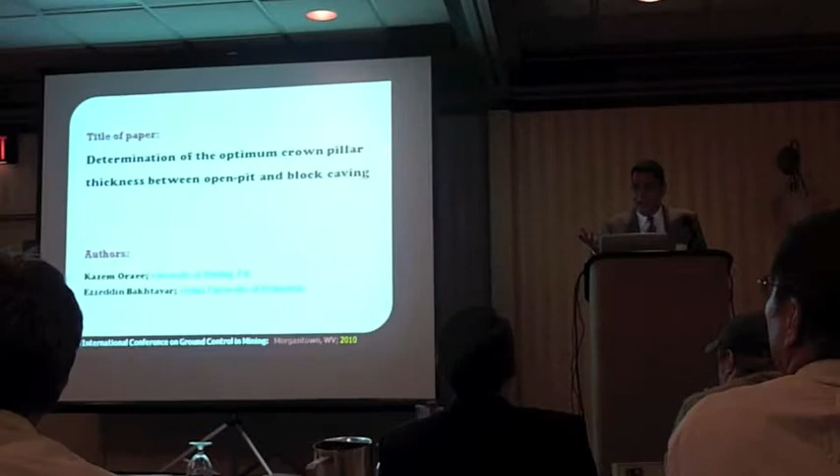Now we are going to talk this time about something which is slightly different, although it is pillar again. Ground control and pillar, of course. What keeps the ground is the pillars, but slightly different. The crown pillar between open cast and underground mining, and especially in this case, block caving. But it's slightly different from the previous ones.

Determination of the outline: introduction, dimensional analysis, which is what we are going to use to calculate the optimum thickness of the crown pillar, modeling, and then conclusions.

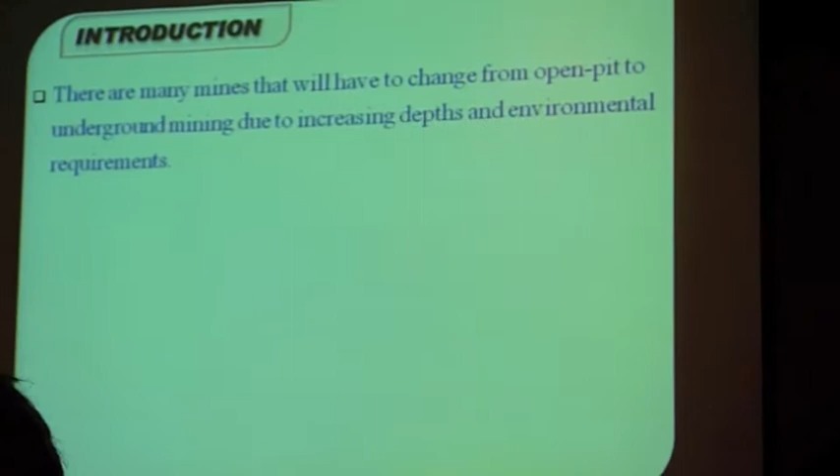There are many mines which are going to have to change from open cast to underground mining soon, in the next years or few decades. The most important reasons are that the depths are increasing, therefore they are becoming more and more expensive. Secondly, the relatively recent reason is the environmental requirements.

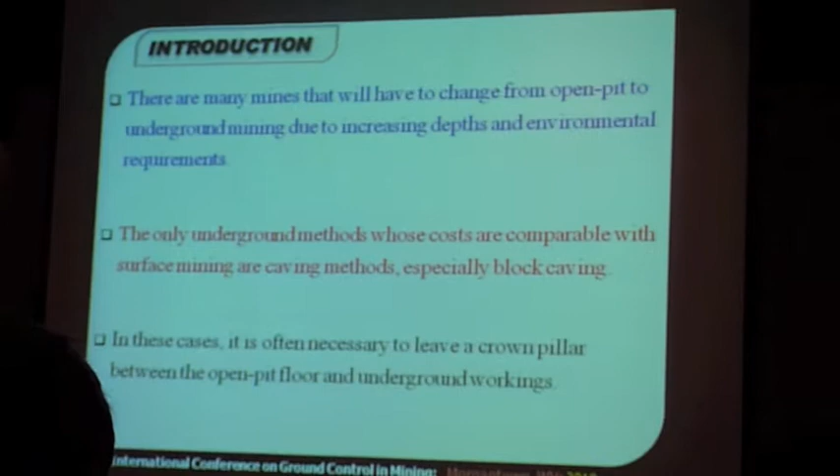We all know open cast mines have much more environmental effects than underground mines. And when that happens to any open cast mine, the first methods they will have to consider will be caving methods.

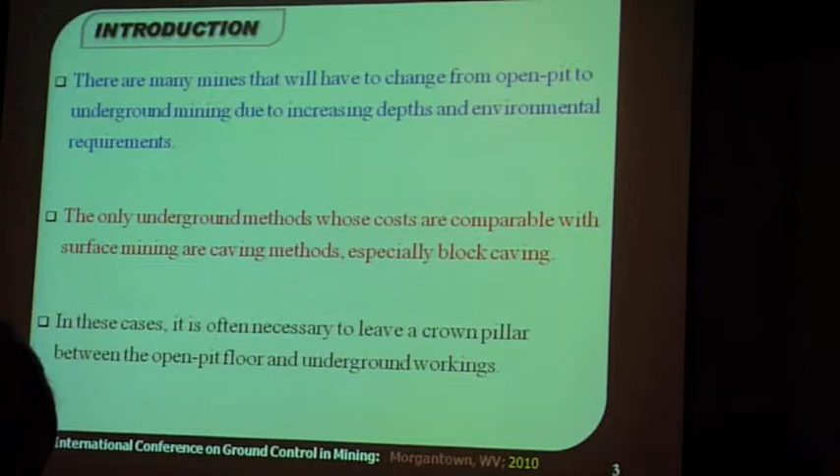The reason why open cast mining companies don't like changing into underground mining is that the costs of underground mining are expected or thought to be higher. But there is one underground method in particular, the block caving method, whose costs are comparable with surface mining, especially when the surface mining pits become deeper.

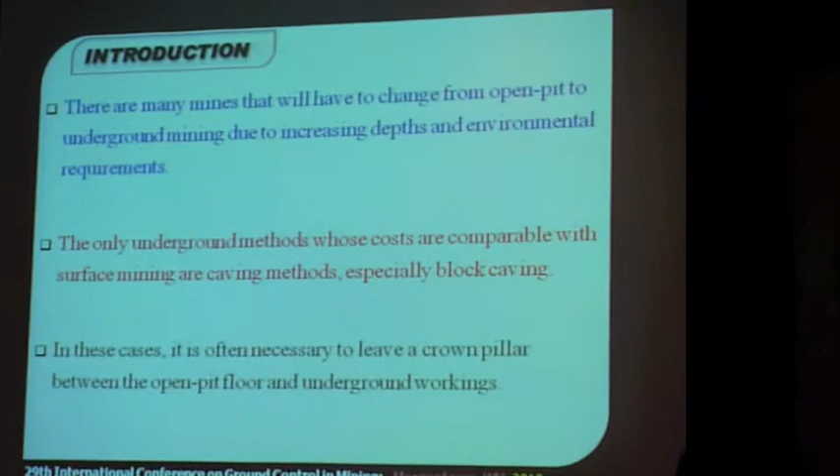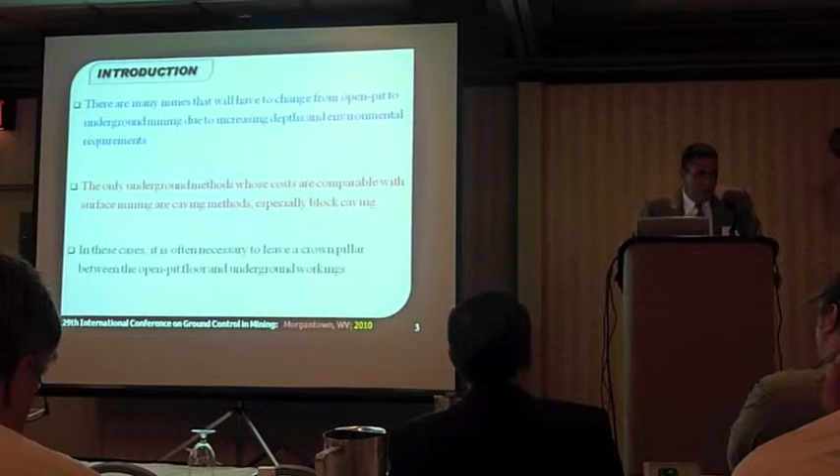In such cases, where there is an open cast mine and the rest of the deposit is going to have to be mined by underground mining, there is a crown pillar required to be left. What we want to do is find the thickness of this crown pillar.

The main requirements of these crown pillars are to provide ground control, just like all other pillars, for both the surface and underground mine, and to minimize interference between the two mines, which is very important.

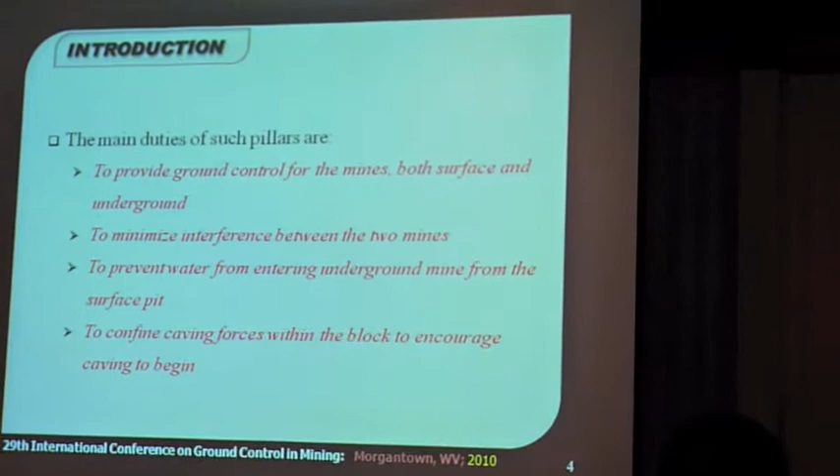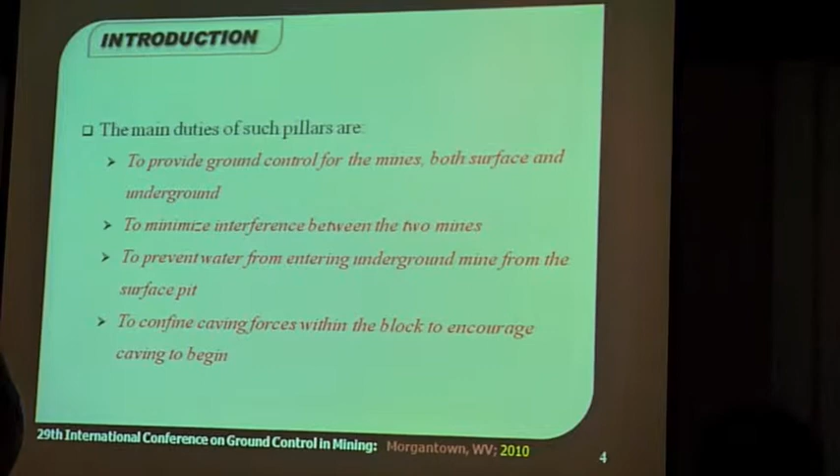I don't want to emphasize these, you all know, everybody has talked about that. And to prevent, particularly in this case, the entering of water from the surface to the underground mine.

Again, as we know, when surface open cast pits become deeper, the problem of water increases, and we don't want this water to seep into the underground mine.

And finally, particularly in this case, to confine caving forces within the block to encourage caving to begin. In block caving, this is one of the biggest worries of mining design engineers when they decide to use block caving and when they are planning block caving blocks.

In case they design the block, they drive all the roadways, so many of them, develop all the roadways underneath the block, which could take many months or even years, and a lot of money is spent on driving and maintaining these roadways, and then the ore inside the block does not start to cave.

I always say to my students that if it doesn't start to cave, all we can do is sit down in one of those tunnels and pray.

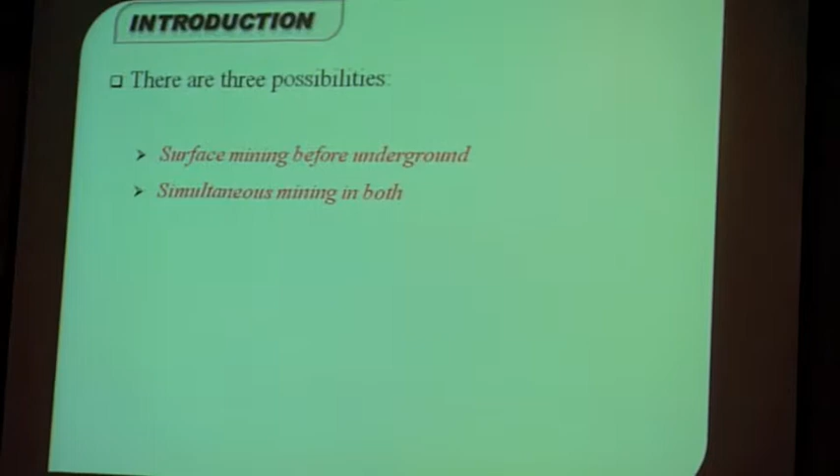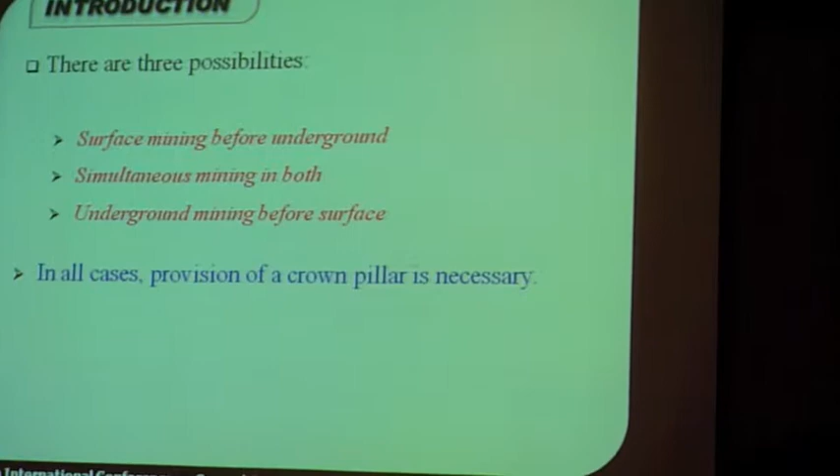There are generally three possibilities in these cases: surface mining before underground mining, simultaneous mining in both, and underground mining before surface. In the second and third, the crown pillar is totally necessary. Even in the first one, it can be said that it is necessary to leave a crown pillar.

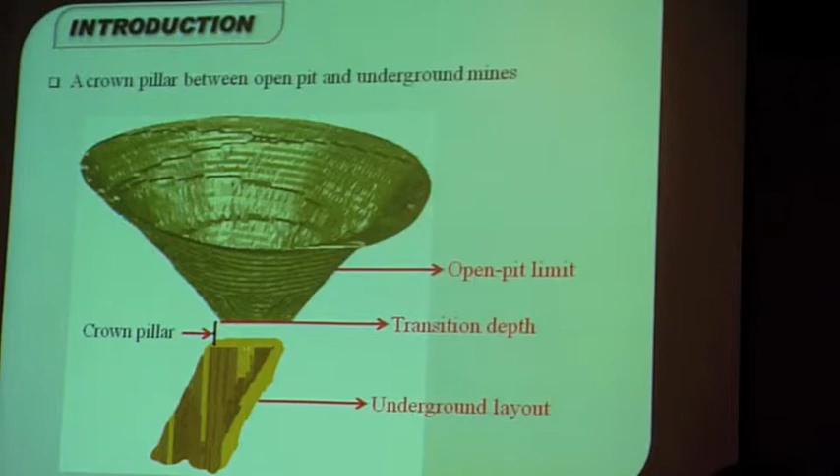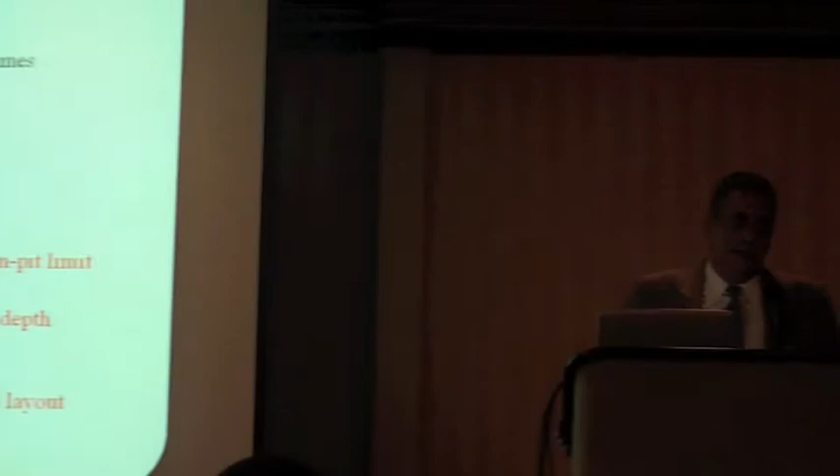This is just a picture. The top part is the open pit, conical shape, of course. Then the transition depth, that is the depth at which the cost of mining each ton of ore is the same for underground and surface mining. Below that depth, it is cheaper to mine the ore by underground methods, in this case by block caving.

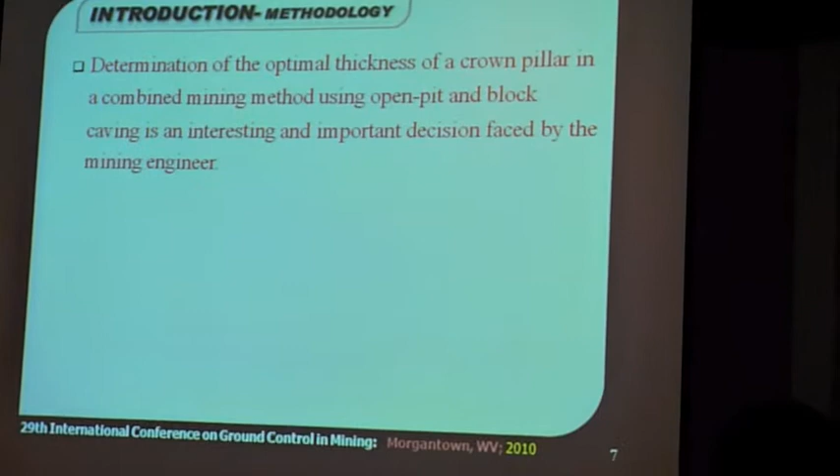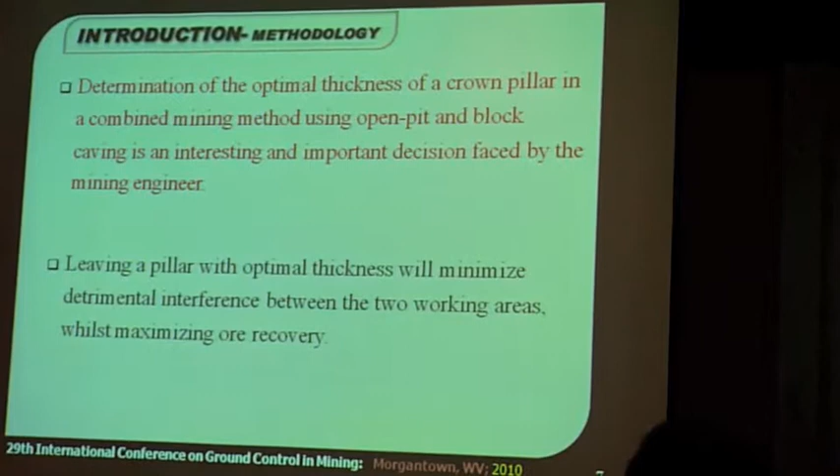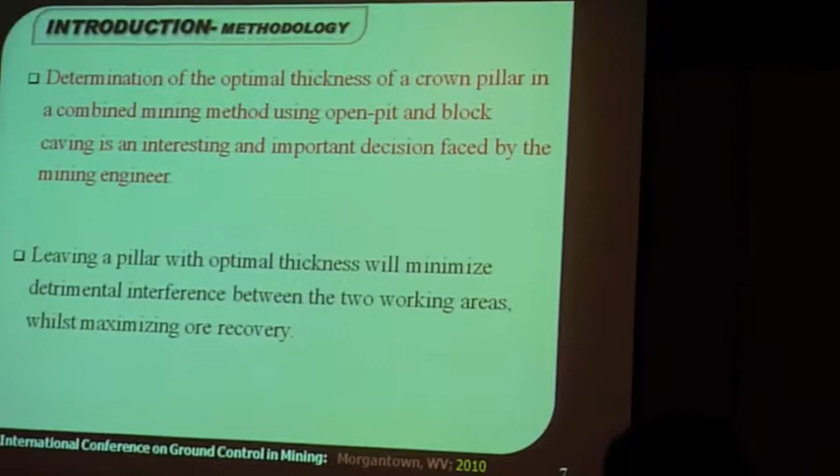Determination of the optimal thickness of a crown pillar in a combined mining method using open pit and block caving. I stress in this paper we are assuming that the underground method we are going to use is block caving, because the formula produced will be different if we had decided to use shrinkage, cut and fill, supported stoping, or even sublevel caving.

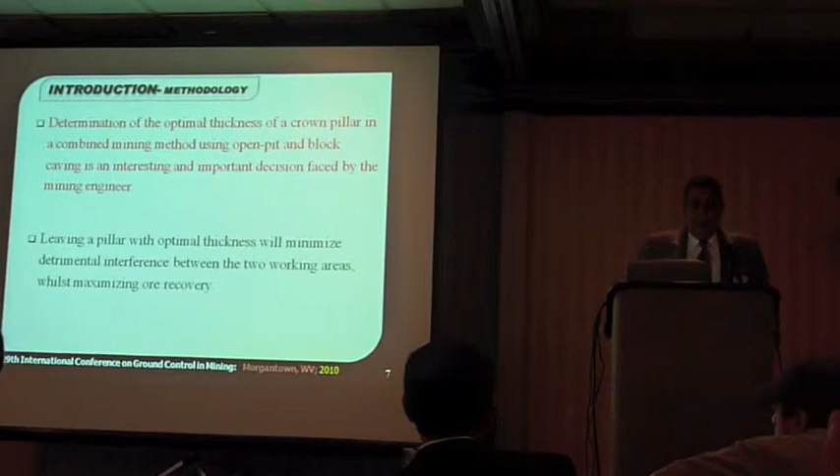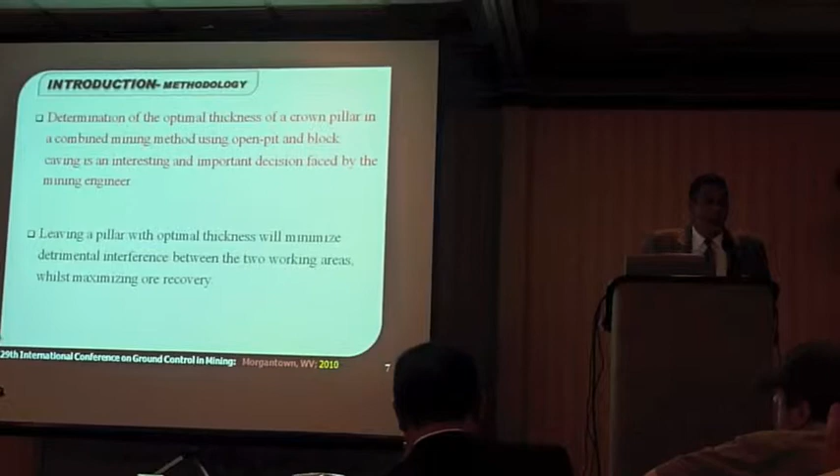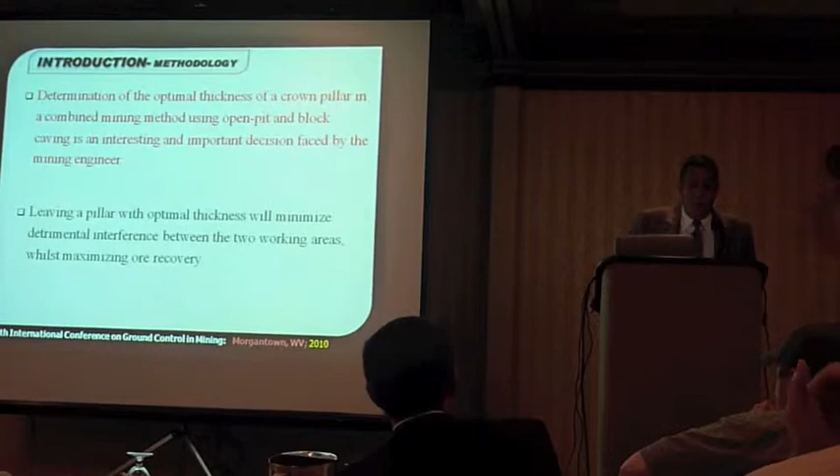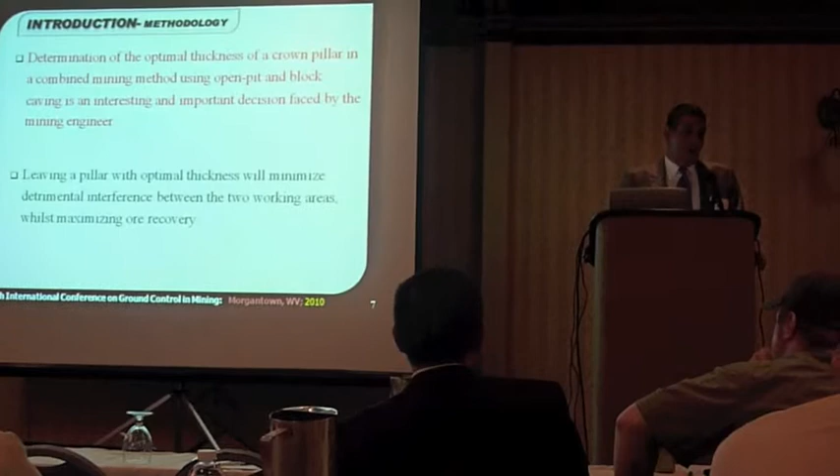This problem of determining the optimal thickness is an interesting and important decision. It is interesting because it's relatively new, and important because leaving a pillar with optimal thickness will minimize detrimental interference between the two working areas, whilst maximizing ore recovery. If it is too thin, it has detrimental effects. If it is too thick, we have reduced recovery.

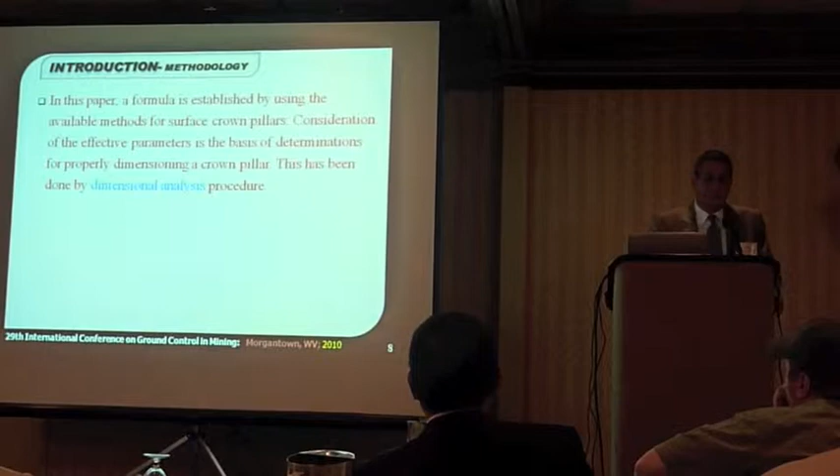Methodology: in this paper, a formula is established using the available methods for surface crown pillars. We do have methods for surface crown pillars.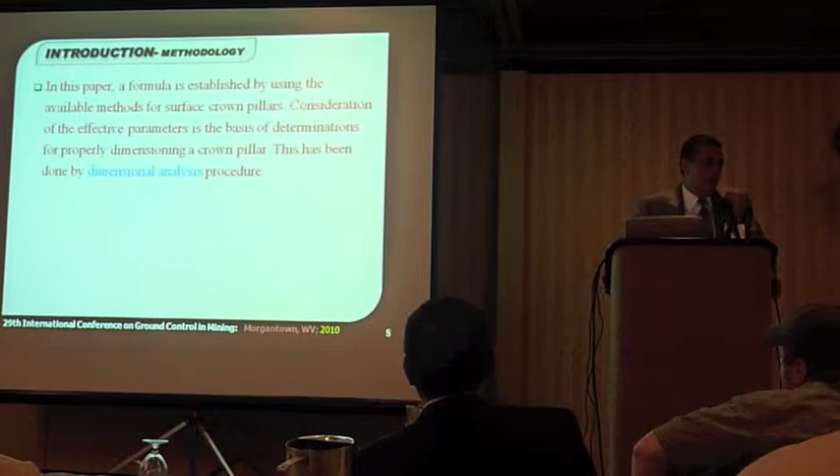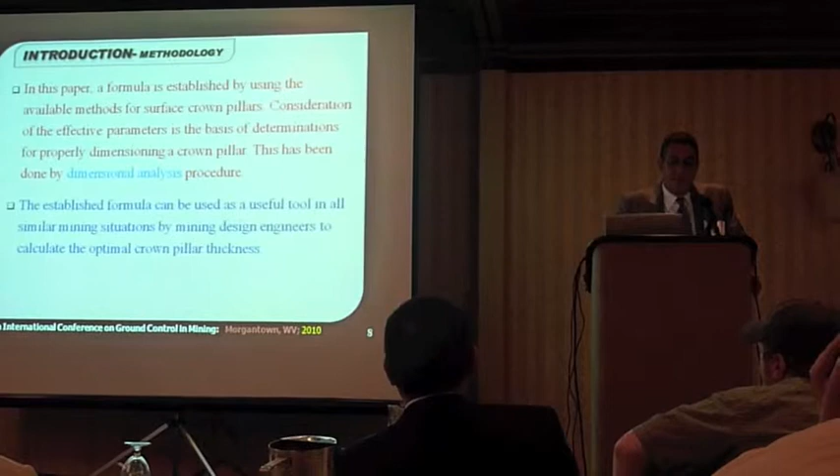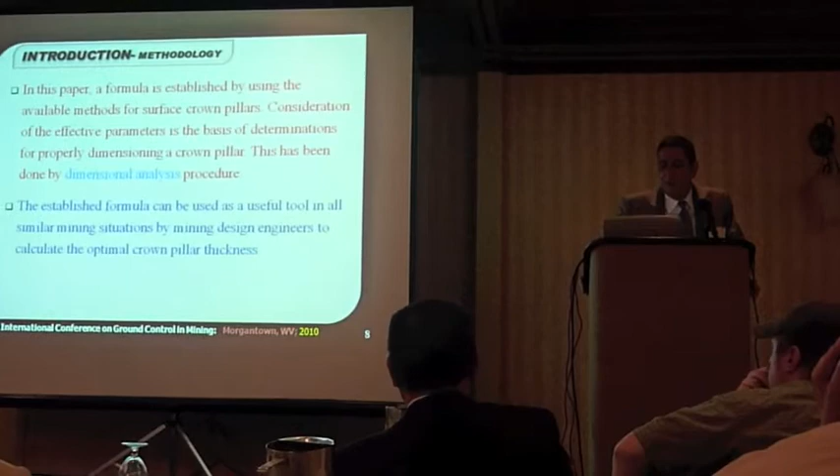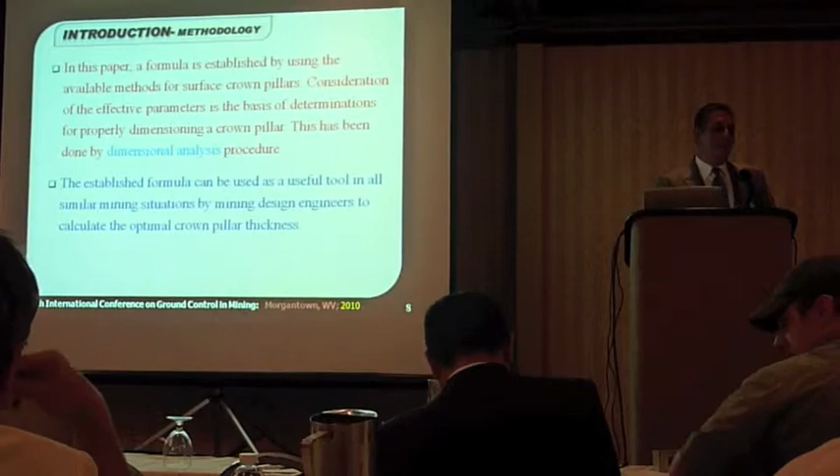Consideration of the effective parameters is the basis of determination. This has been done by dimensional analysis, the method we are going to use. The established formula can be used as a useful tool in all similar mining situations by the mining design engineer to calculate the optimal crown pillar thickness.

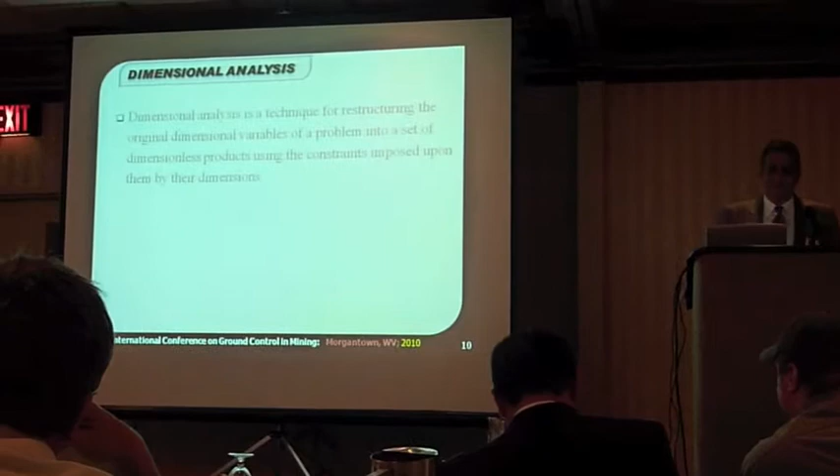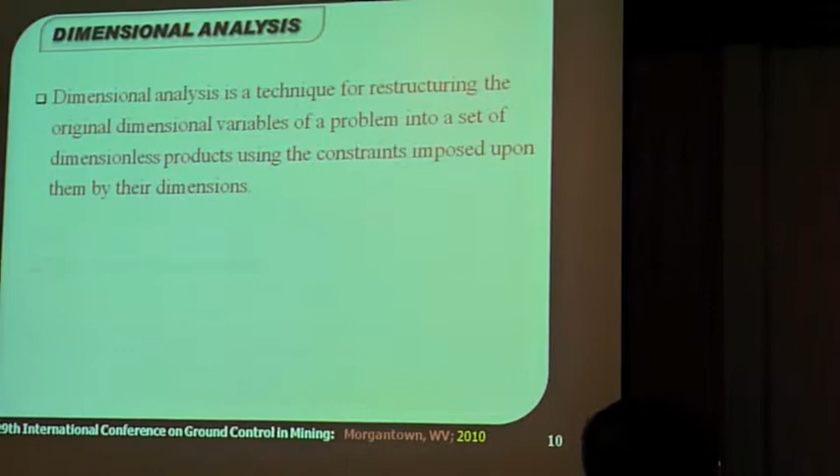Dimensional analysis is a technique for restructuring the original dimensional variables of a problem into a set of dimensionless products, using the constraints imposed upon them by their dimensions. This is the definition of dimensional analysis.

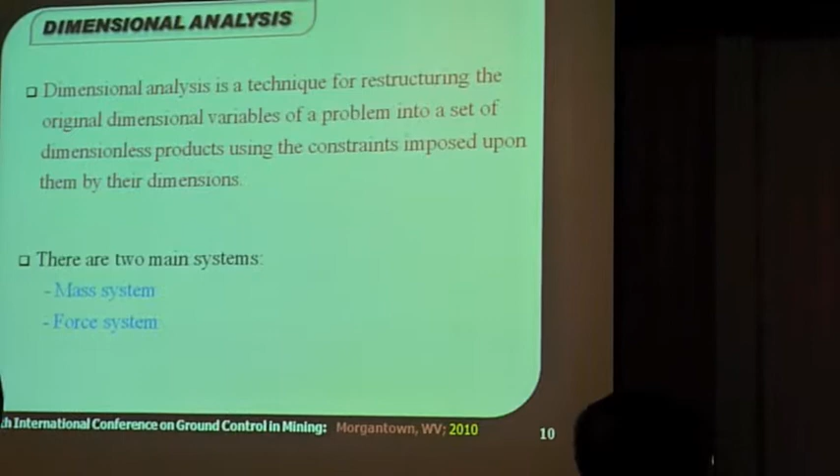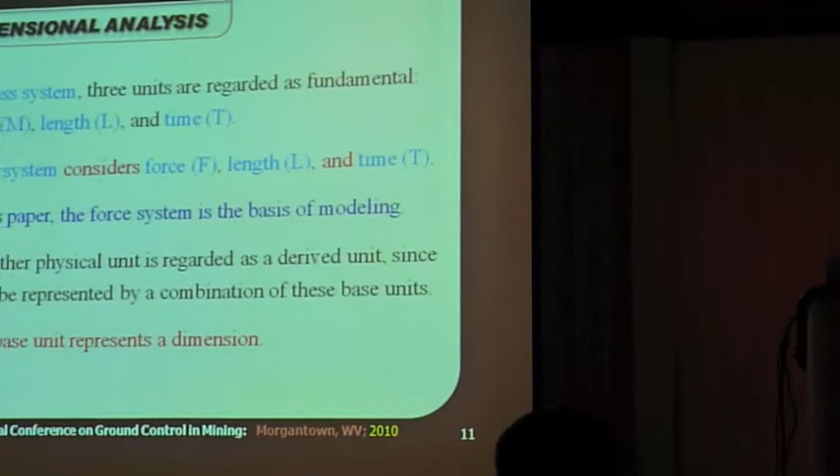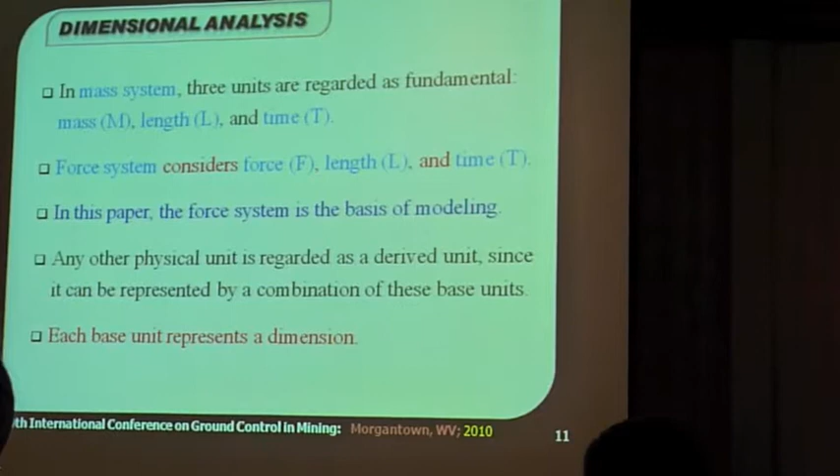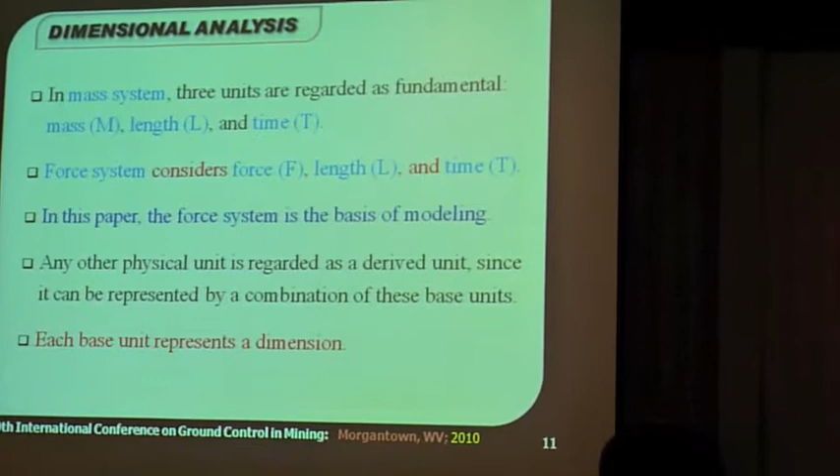There are two main systems: the mass system and the force system. In mass systems, we have mass, length and time, and in the force system, we have force, length and time. In this paper, we are going to use the force system. Any other physical unit is regarded as a derived unit, since it can be represented by a combination of these three main units. Each base unit represents a dimension.

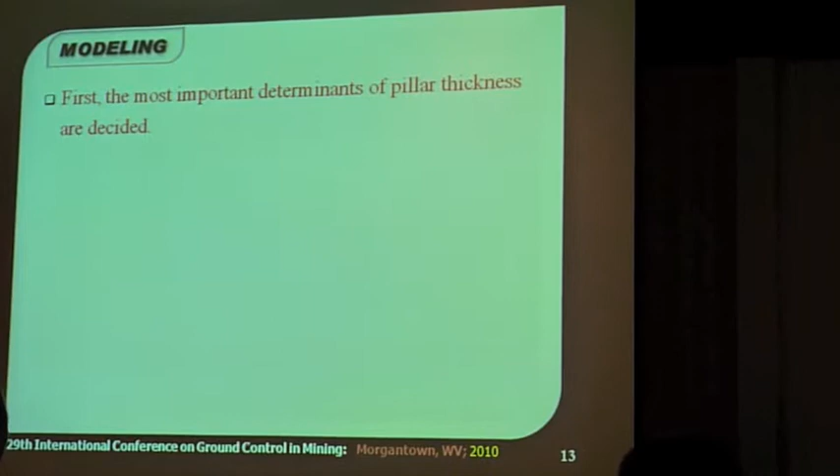And the modeling procedure: first of all, we'll have to find the most important determinants, the most important factors which affect the thickness of the crown pillar.